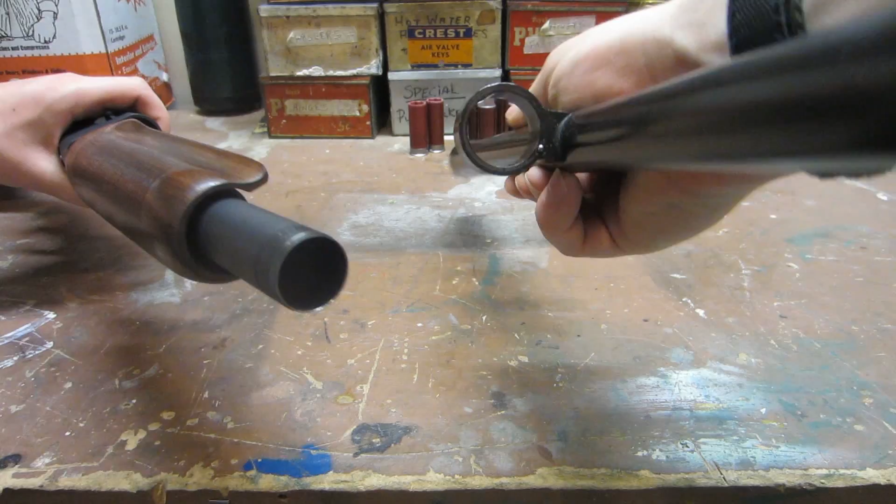Though it's nearing its 65th anniversary, the Remington 870 is still one of the most versatile pump shotguns on the market today. One of the attributes that makes the shotgun so flexible is the way its barrel is mounted. While many competing shotguns like the Ithaca 37 and Mossberg 500 have barrels that attach to the end of the magazine tube, the 870's barrels attach around the magazine tube, leaving its front end unobstructed.

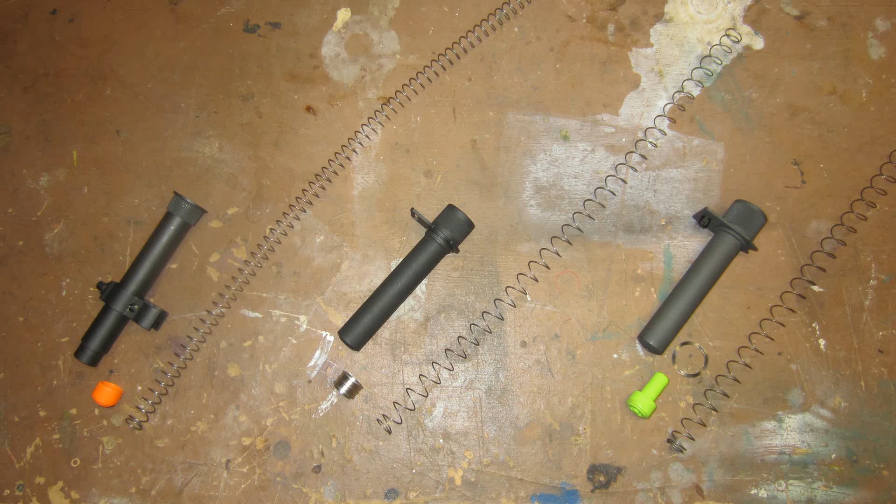And because all 870 magazine tubes are open-ended, their capacity can easily be expanded by simply replacing the magazine cap with a magazine extension. Unsurprisingly, magazine extension options abound for the best-selling 870. Between factory Remington extensions and offerings from a slew of aftermarket companies, there are well over 100 different kits to choose from, with capacities ranging from +1 to +18, and everything in between.

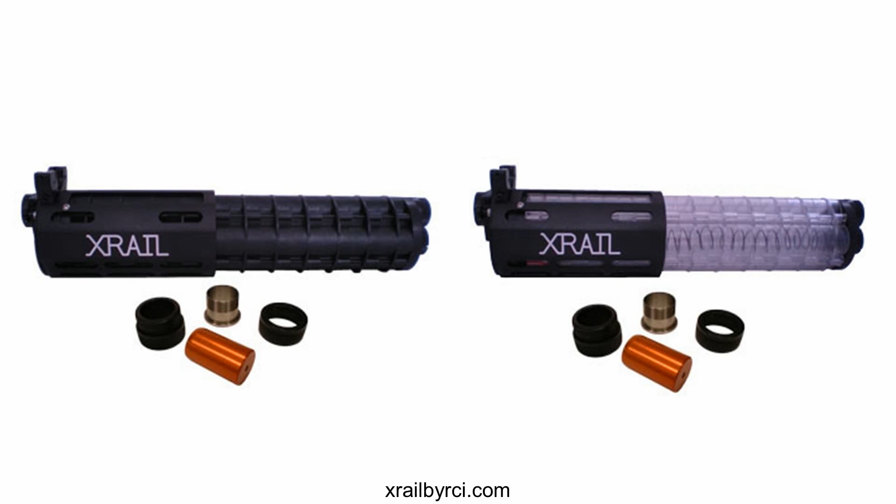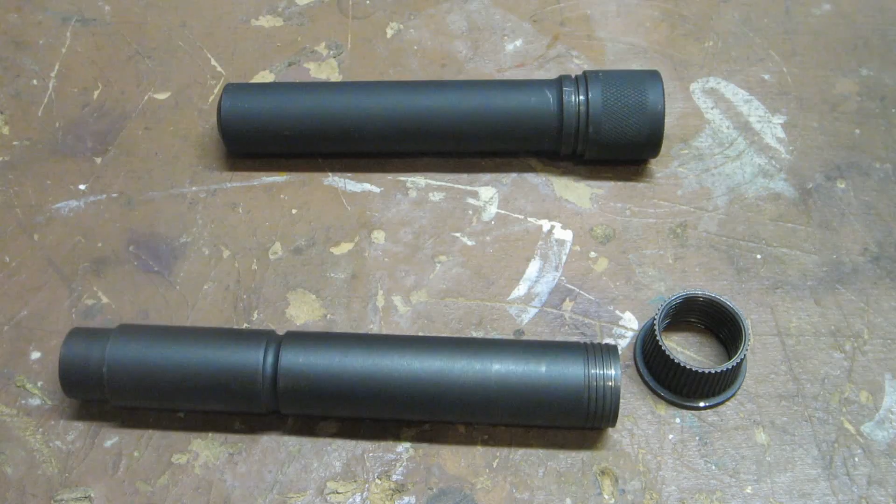Though the construction and features of these extensions vary, their basic designs tend to fall into two major varieties, single-piece and two-piece. It's very helpful to understand the distinction between these two types, as both have their respective advantages and disadvantages, and choosing the best one for your purposes requires these attributes to be considered in the context of the rest of your build. Now, you might be confused by the terms single-piece and two-piece, since an extension kit will usually include more than just one or two parts.

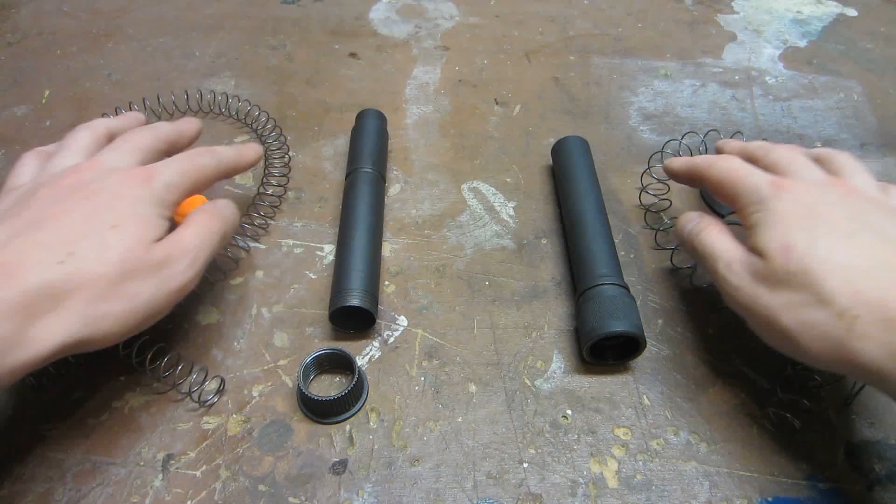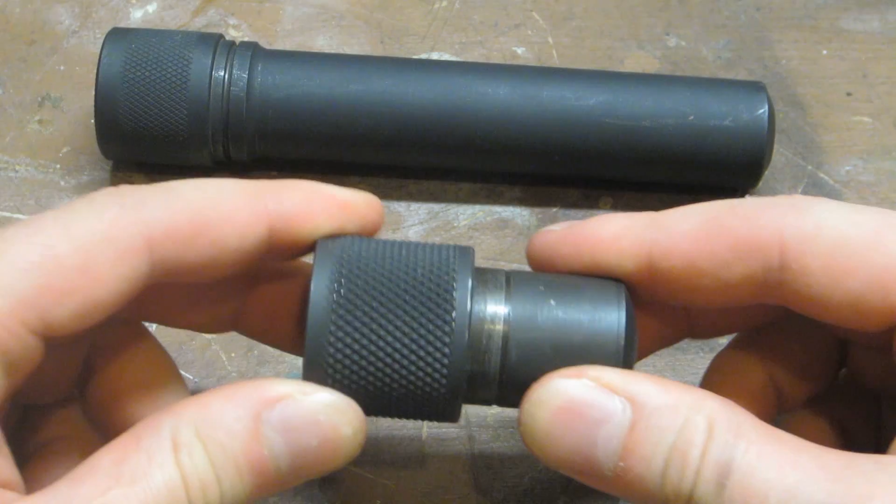When talking about single or two-piece extensions, we're not looking at the entire kit, just the two main functional elements of the extension itself. These elements are the female threaded portion that screws onto the magazine tube and secures the barrel, and the extended tube section that provides the additional capacity. With single-piece extensions, these two components are either machined as one seamless part, or separately made parts that are permanently attached. Either way, the result is one rigid item that screws onto the end of the gun's magazine tube and is tightened against a barrel guide ring just like a magazine cap.

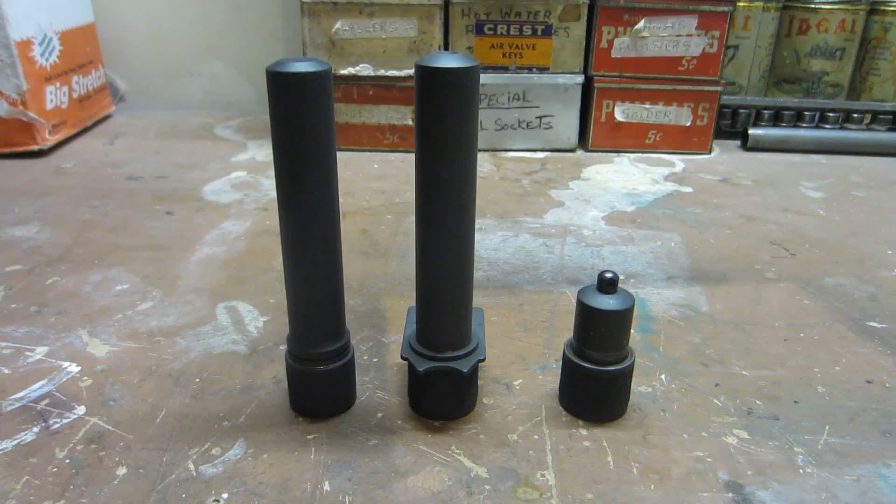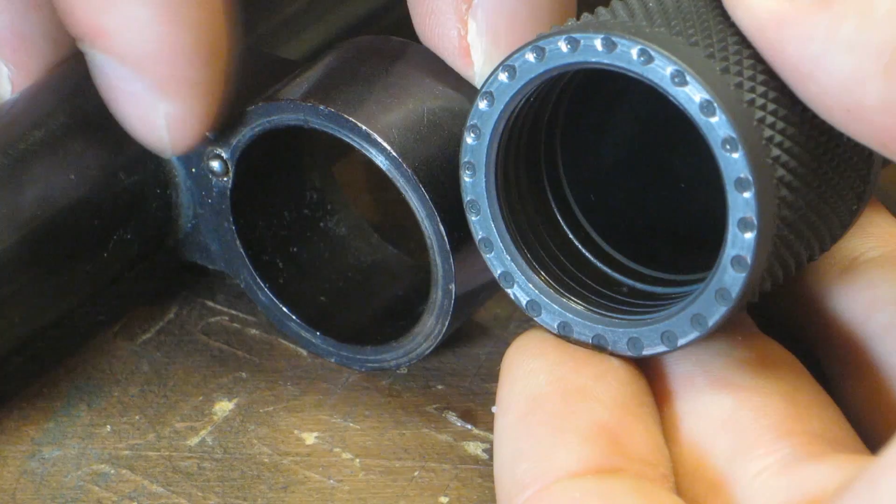Two-piece extensions break up these elements into two separate components, a coupling that screws on like a magazine cap, and then an extension tube that threads into the coupling. The biggest advantages of single-piece extensions are their simplicity and ease of installation. Because they're one rigid piece, they're pretty much just elongated magazine caps, and the entire thing can lock down against the barrel guide ring by engaging the barrel's locking detent or by using a lock washer. No need for a separate clamp if you don't want to use one. This makes them very easy to install and remove. Tools are not usually needed.

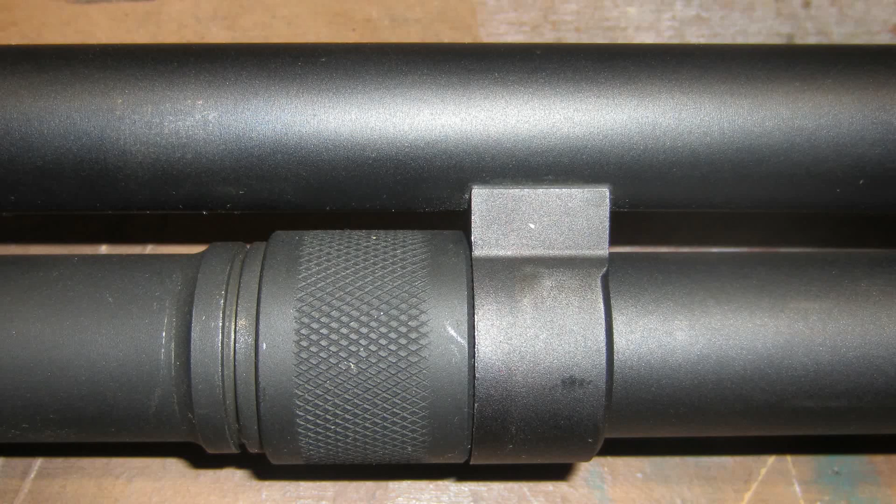But this simplicity comes with a trade-off. When installed, single-piece extensions tend to have an internal gap at the joint between the base magazine tube and the extension tube. This is due to the need for any cap or extension to be able to be tightened against the barrel's guide ring. If the barrel is not properly secured, the gun will be unreliable and potentially unsafe.

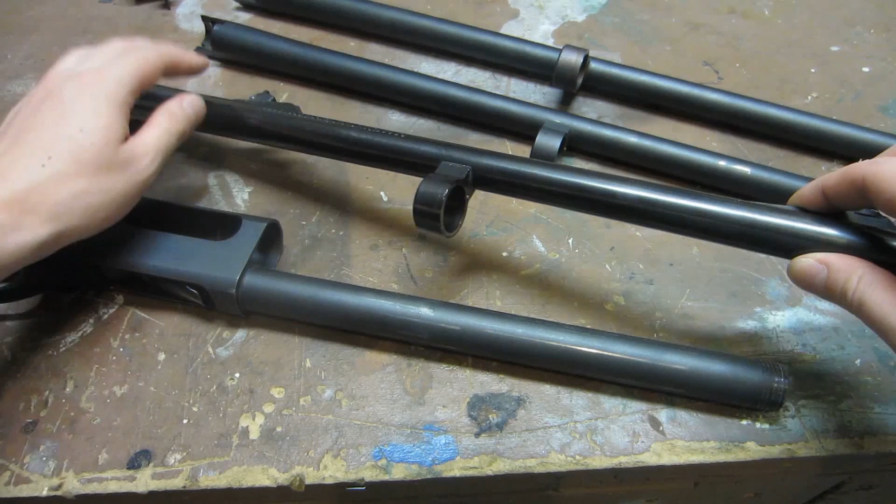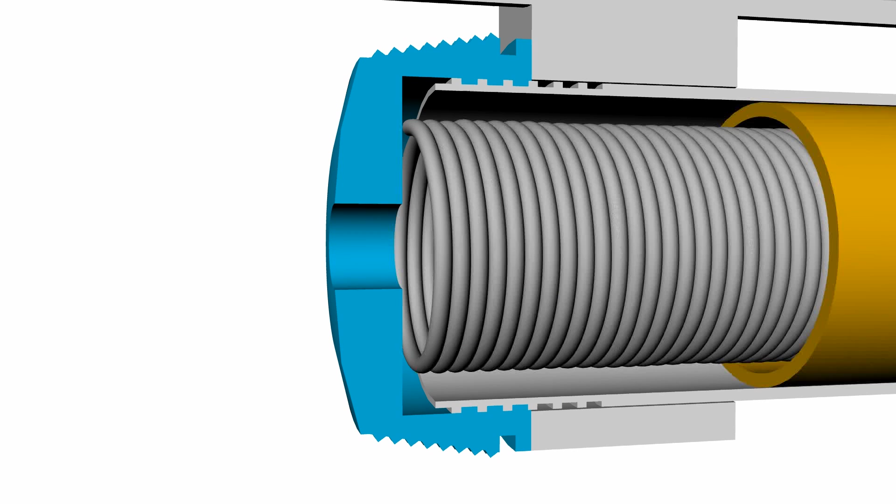Due to variations in the manufacture and attachment of the magazine tube, barrel, and barrel guide ring, along with differences between factory and aftermarket barrels and receivers, the length of magazine tube thread in front of the barrel guide ring can vary slightly, and magazine caps and extensions must be designed with some amount of extra thread travel to ensure full compatibility. For magazine caps, the gap that results from this excess space is a non-issue because it's at the very end of the magazine, and only a few spring coils ever encounter it. But with magazine extensions, shell rims and the magazine follower have to pass back and forth across this transition, and they can hang up in this gap. Installing accessories underneath the extension will make this gap even wider and can increase the likelihood of hang-ups.

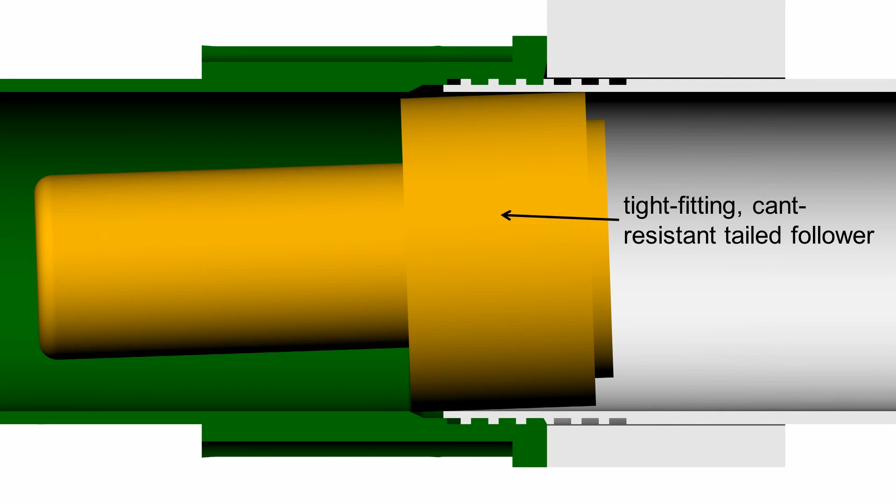Good extension design and proper follower selection can mitigate the effects of this gap and ensure reliable function while avoiding compatibility issues. But not all extensions are designed as well as they could be, and some types of followers just don't handle even small gaps reliably. If you're going to use a single-piece extension, especially a +2 or longer kit, it's very important that you test it thoroughly with whatever other magazine parts you're planning on using.

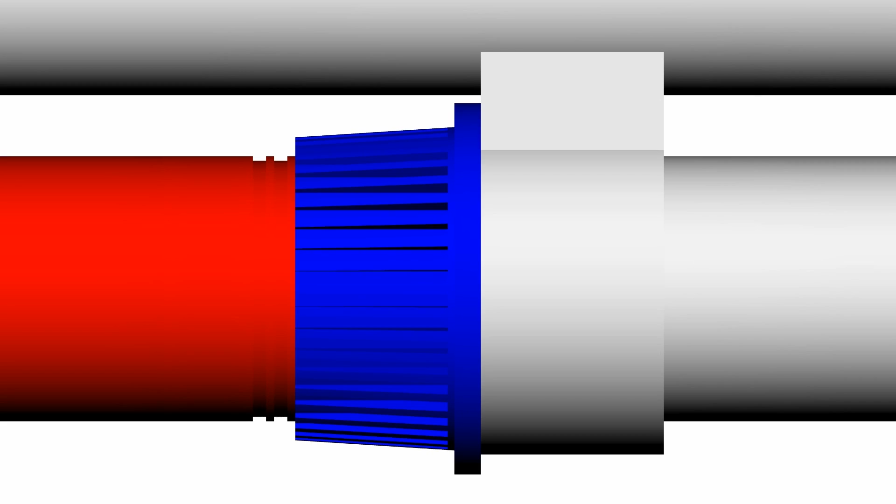Two-piece extensions, with their separate extension tubes and couplings, can allow for a truly seamless internal transition if the extension is designed so that the two tube sections butt directly against each other inside the coupling. As long as the extension has enough thread, this joint will remain tight despite variations in the length of exposed magazine tube or the presence of undercap accessories. The two-piece design also makes these extensions much more versatile than single-piece kits.

If you use your shotgun for multiple applications that call for different magazine capacities, a two-piece extension system can let you change extension tubes while keeping the same coupling, bracket, end caps, and sometimes even the spring. Many two-piece extension systems offer a variety of interchangeable extension tubes, and you can make custom length tubes relatively easily by shortening and capping a longer or unfinished tube. Some systems with detachable extension tube caps even let you chain multiple extension tubes together with additional couplings. This modularity can also make repairs easier and less expensive, since any damaged components can be individually replaced.

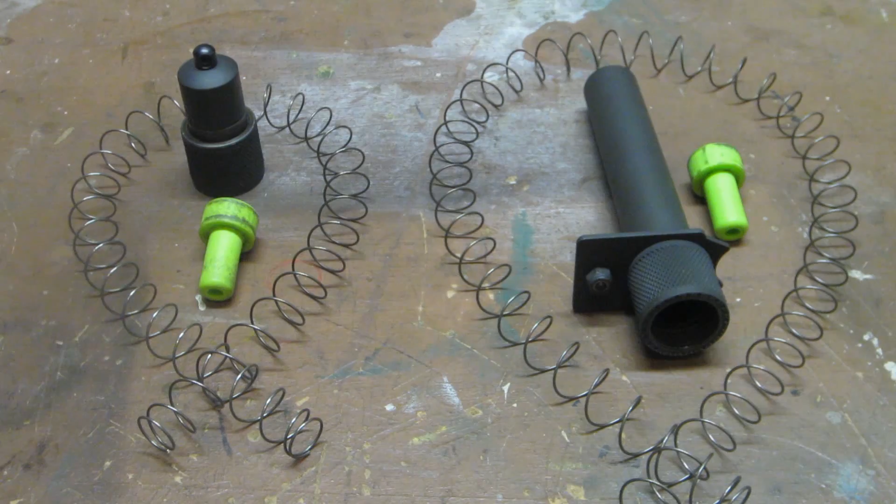If you want more configurations or need to remedy irreparable damage with single-piece extensions, you'll need to purchase additional complete extension kits. And because a single-piece extension is in essence a long magazine cap, the gun cannot function properly if it is removed or works loose under recoil. With two-piece extensions, the coupling does all the work of holding the barrel on the gun, so the barrel does not have to be loosened or removed when changing extension tubes, and if the extension tube works loose, it won't affect the gun's core functionality. In an emergency, the gun can even be used as a single shot without an extension tube installed.

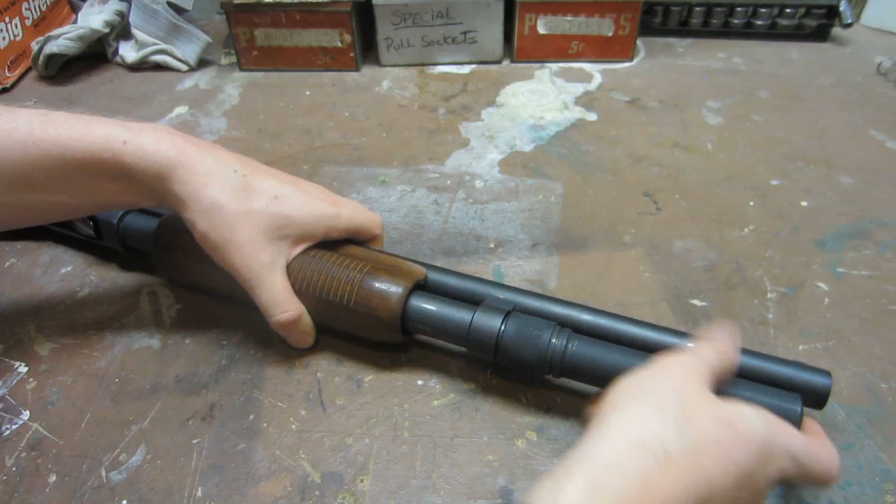So why aren't all extensions two-piece if this system is so much more reliable and versatile? Well, as always, there are trade-offs. Unlike single-piece extensions that can be simply screwed on and off by hand like magazine caps, two-piece extensions are a fair bit more involved to install and remove.

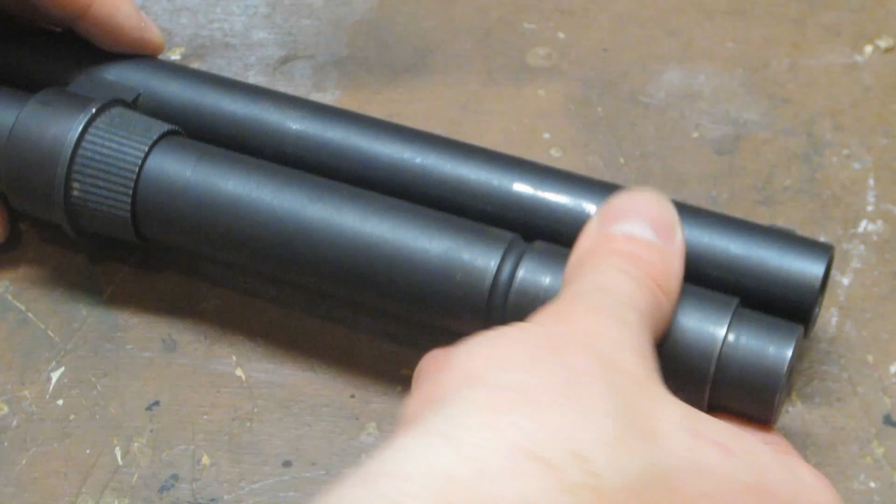The coupling and extension tube need to be installed separately, and because only the coupling is secured against the barrel guide ring, the extension tube will tend to back out under recoil. To keep it in place, the tube often must be clamped to the barrel. These clamps add weight and complexity and usually require tools to remove or replace, so you'll need to have the right screwdriver or Allen wrench on hand whenever you want to take your gun apart.

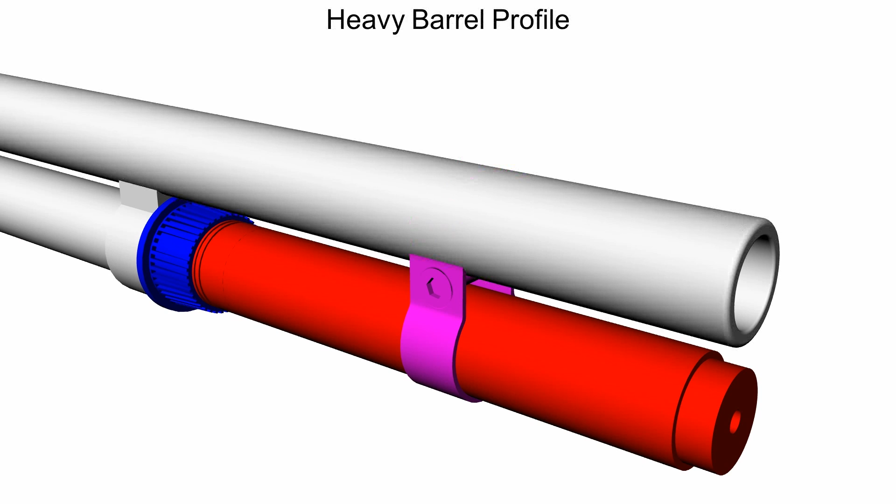And you may have to pull off other parts and accessories when installing or removing some clamps. It's also important for the clamp to be properly matched to the size and spacing of your build's extension and barrel, which can be difficult with heavy profile or other non-standard barrels. Finally, not all two-piece extension kits actually come with clamps, so this may be something you'll have to purchase separately.

Now, these clamps do help to reinforce the extension, and they're a popular method for mounting accessories, so for a lot of builds, this requirement may not be that big of a deal. But there are other cases where a clamp isn't really necessary, and being forced to use one just makes things more complicated. And while the butted internal mate of two-piece extensions is seamless and hang-up free in theory, it can be rather finicky in practice.

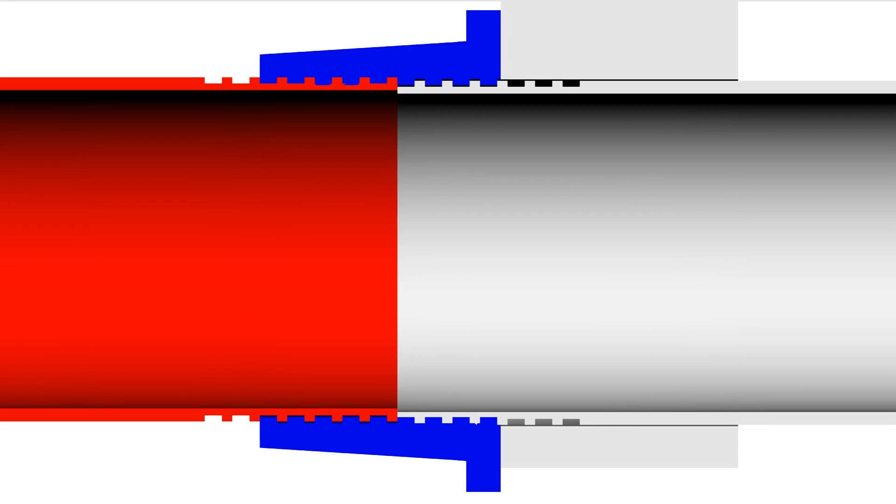Single-piece extensions are intended to function with a gap here. Assuming they're designed well and paired with the right follower, a small amount of additional misalignment or gap width is not a big deal. But because the tubes in two-piece extensions are meant to fit right up against each other, even small gaps or discontinuities at the joint can lead to hang-ups.

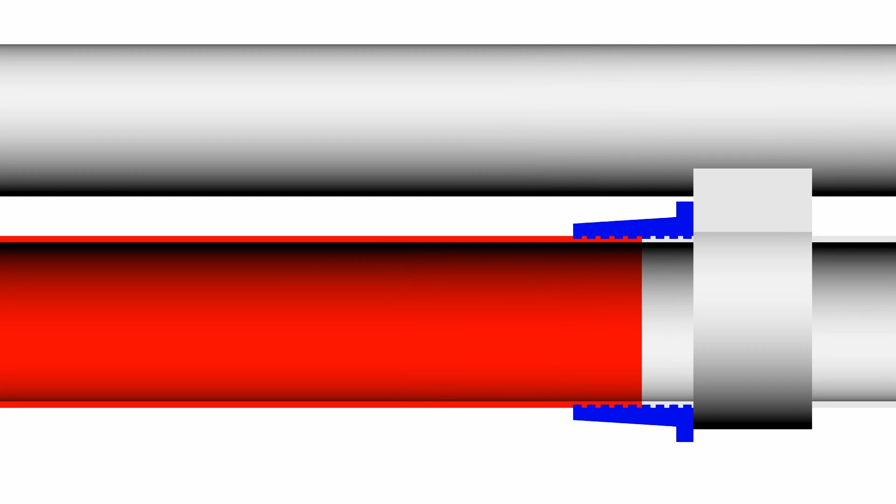In addition to good design and manufacturing, proper installation is essential for achieving a good mate, and there are a number of potential mistakes that can leave a gap inside the tube. Not threading the extension tube all the way into the coupling, placing an overly thick sling plate under the coupling when the extension tube doesn't have enough thread to make up the difference, snagging a spring coil between the tube sections during installation, using a clamp that doesn't match the size and spacing of the mag tube and barrel. All of these are common causes of loading and feeding problems that I've seen inexperienced owners run into.

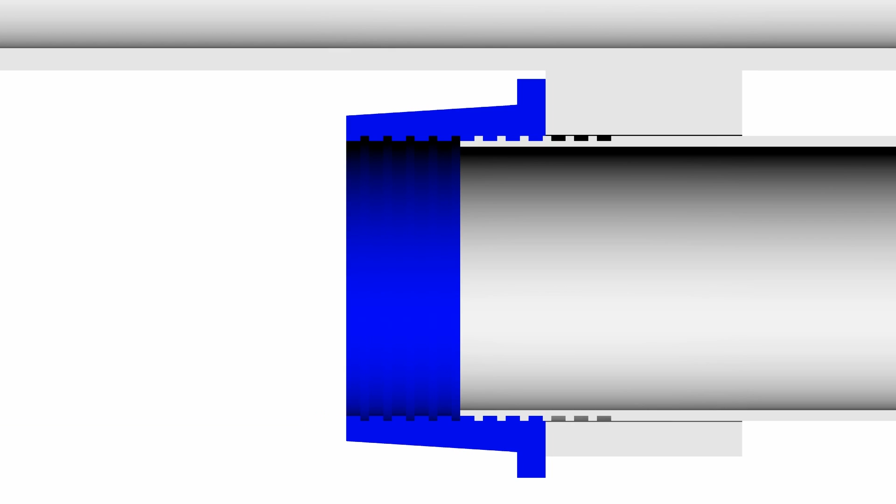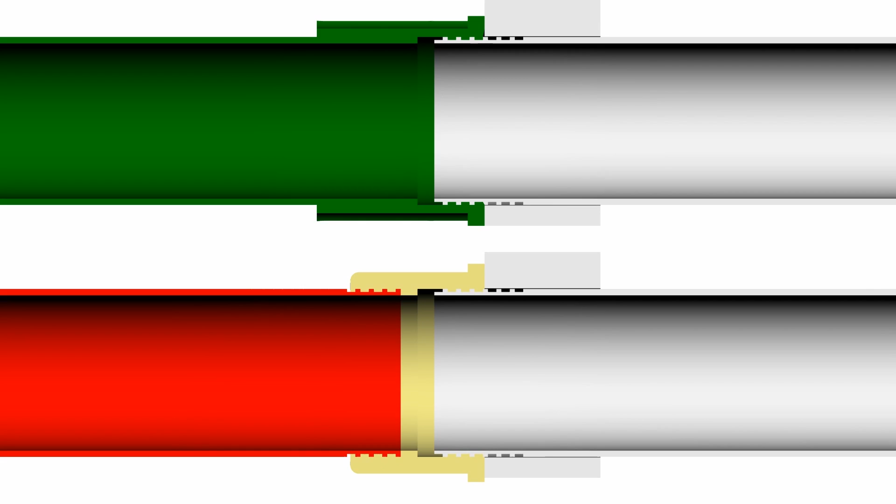Now, some two-piece magazine extensions may use a different joint concept where instead of tightening against a magazine tube, the extension tube tightens down against an internal ridge or lip that's part of the coupling. Regarding advantages and disadvantages, this type of two-piece extension would retain all the characteristics of other two-piece extensions, except that its internal mate with the magazine tube would be much more like the mate of a single piece. I've yet to come across this type of two-piece extension for the 870, but since I haven't personally inspected every extension kit ever made, I figured I'd mention the concept.

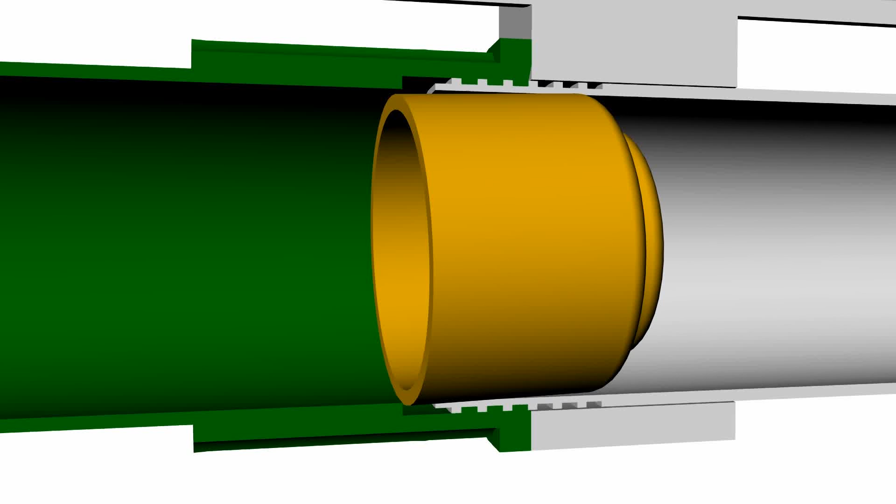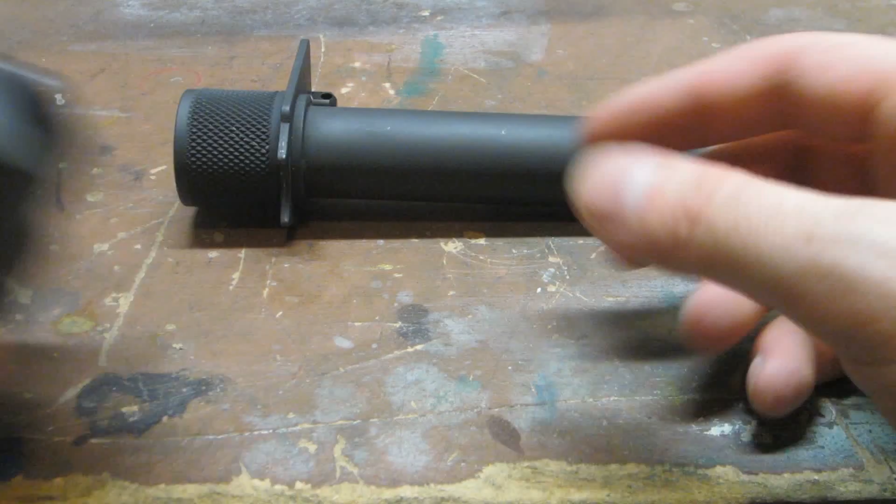So as you can see, each type of extension has its respective advantages and disadvantages. Single-piece extensions are fast and easy to install and remove, and they will work with any 870 barrel out there, but because they're unable to adjust to normal manufacturing tolerances or the presence of certain accessories, there will almost always be an internal gap between the tube sections that can cause hang-ups if the extension is poorly designed or the wrong follower is used. And because the extensions are all one piece, the entire thing has to be replaced if it's damaged or if you want a different capacity.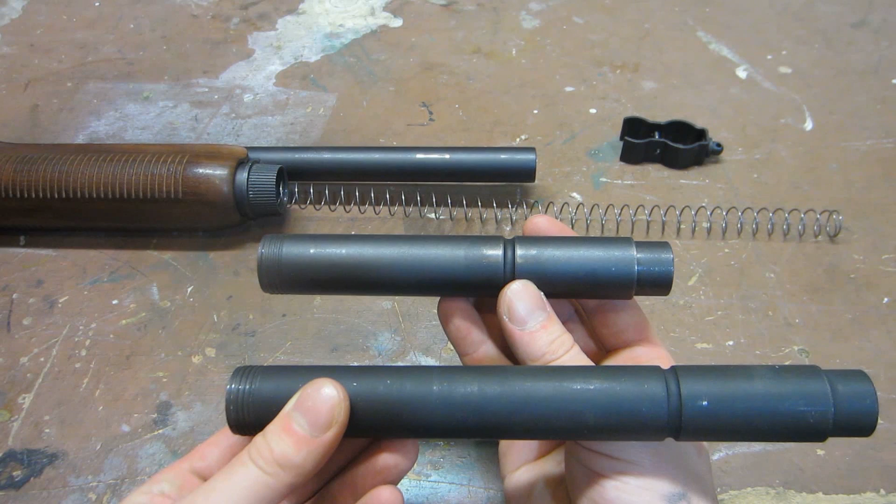Two-piece extensions give you a more seamless internal transition, along with a modular system that allows you to add additional extensions or remedy damage for less expense. On the other hand, their reliability is highly dependent on proper installation, and it's easier, especially for inexperienced owners, to make mistakes there. Their need for a reinforcing clamp or bracket also adds complexity, and can make it difficult to pair them with non-standard barrels.

Which one is a better choice for you? Well, that depends on a lot of things: the specifics of your build, its intended application, and even your personal preferences. Hopefully this video will get you started on figuring things out for yourself, or at least help you ask the right questions while you're planning your build.